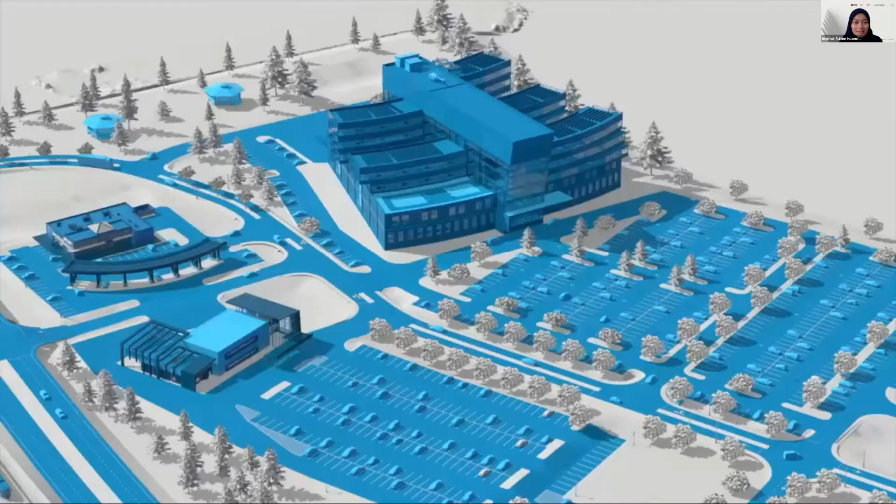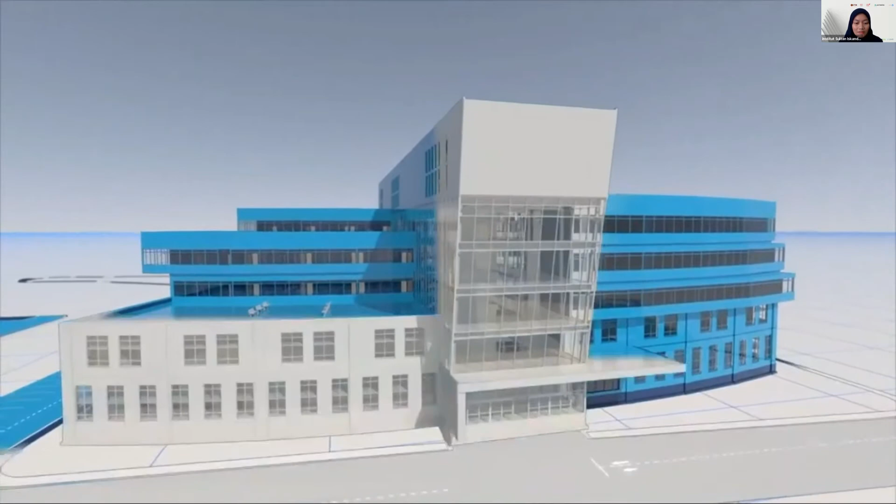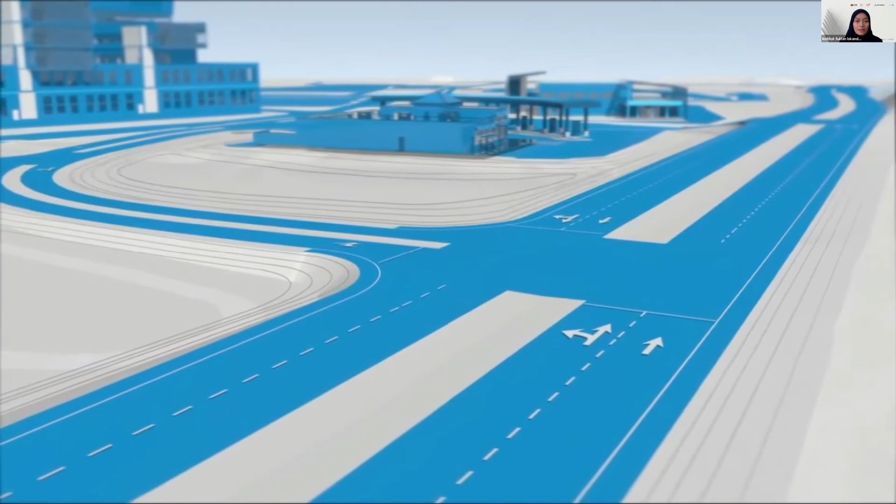Your work changes the map. To achieve success, you need an integrated set of tools that lets you coordinate work across teams, from design to construction. With the AEC collection, every designer, engineer, and contractor has access to multidisciplinary workflows that let them create with ease. Explore what's possible and build with confidence.

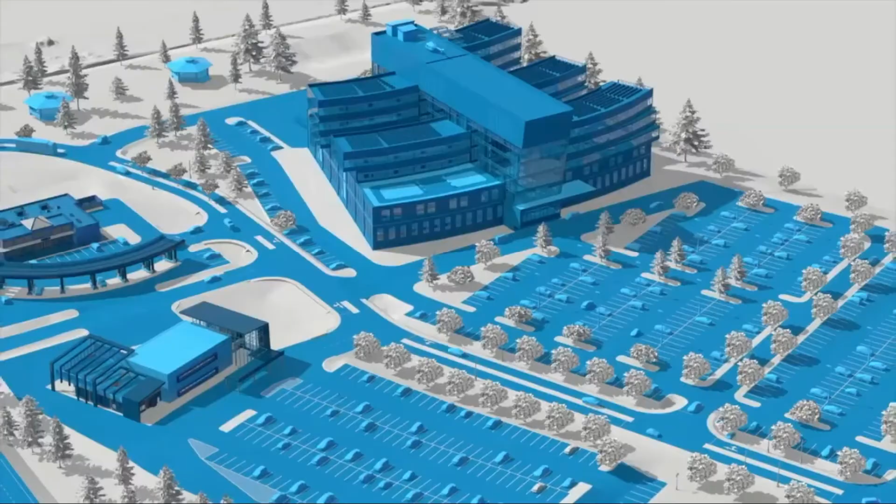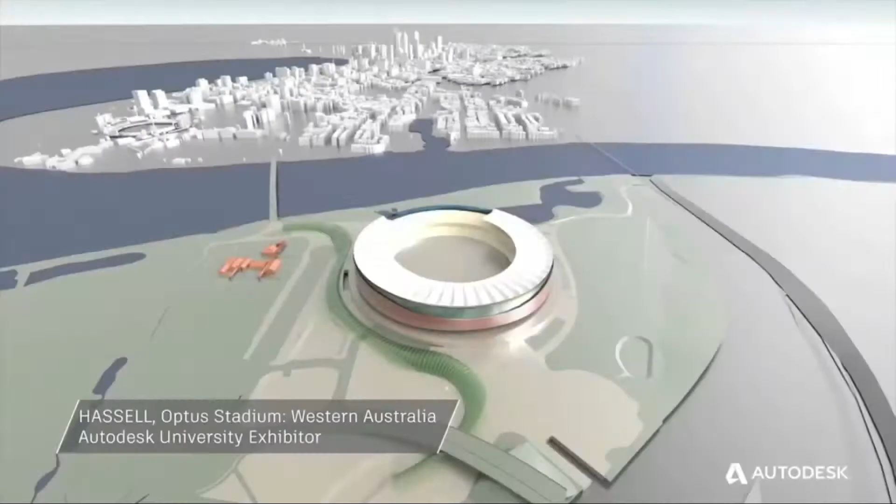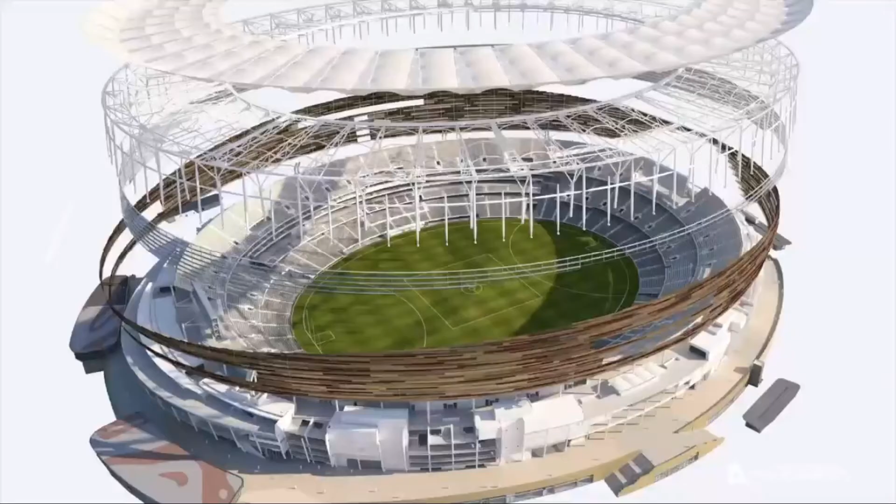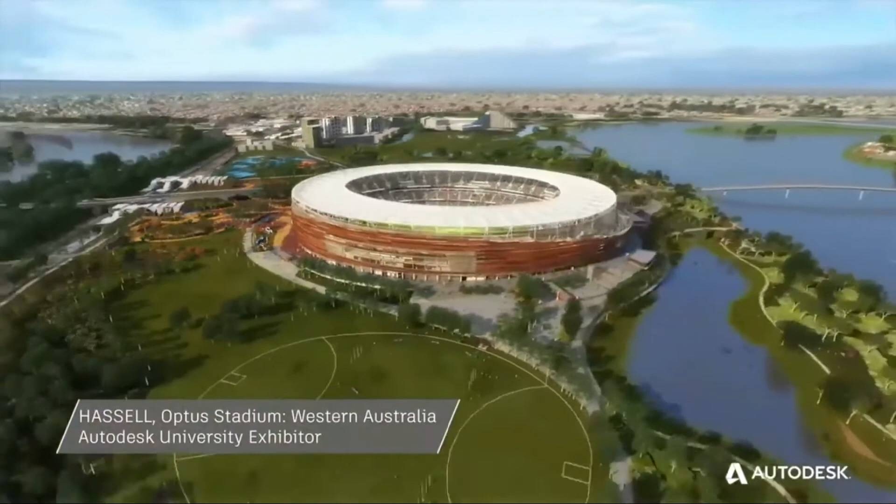To deliver high-performing buildings and infrastructure that transform lives and communities. We want to create the best project, the best experience for people. BIM certainly helps to create a better project. The Optus Stadium project was 149 Revit files, 21 gigabytes of data. Using BIM on a project of that scale helps tremendously.

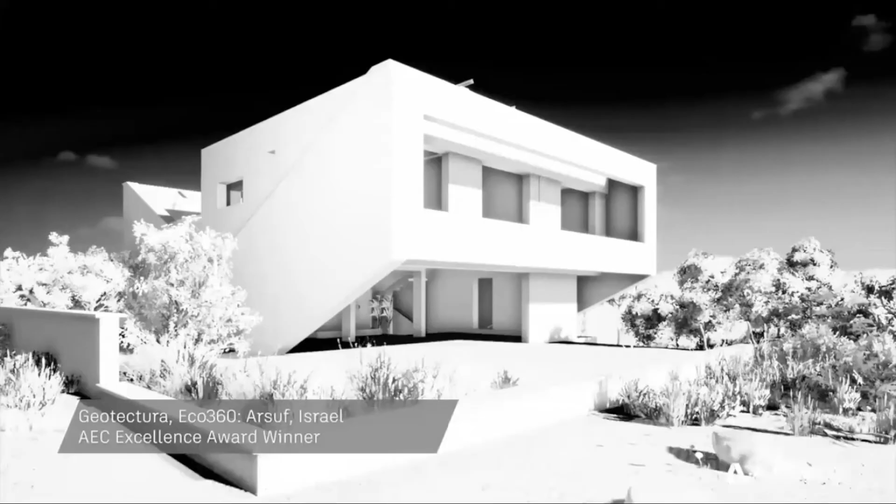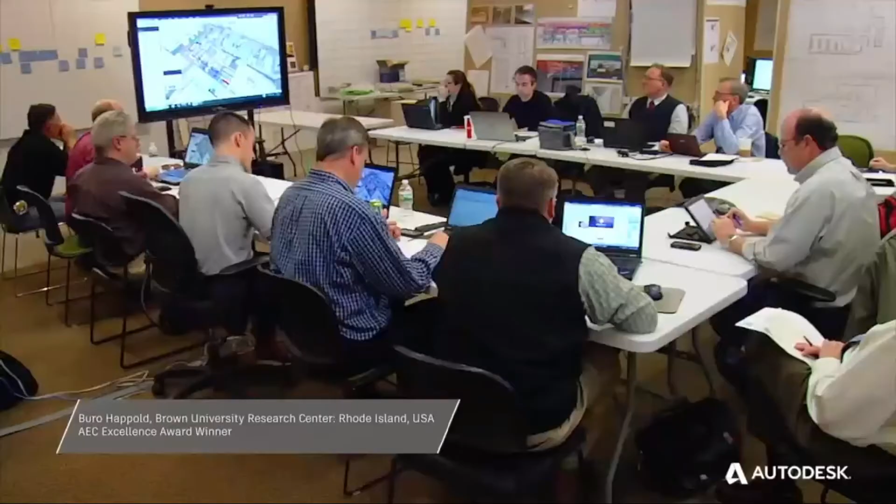Eco 360 is a very small project, but it contains more than 50 elements that make this house very unique. Working with BIM and doing simulations and optimization made me sure that we are on the right direction right from the start. The name of the project is New School of Engineering, which is part of Brown University. BIM allows us to share data seamlessly and allows our trade partners and our design engineers to work together, make changes and coordinate all in one environment.

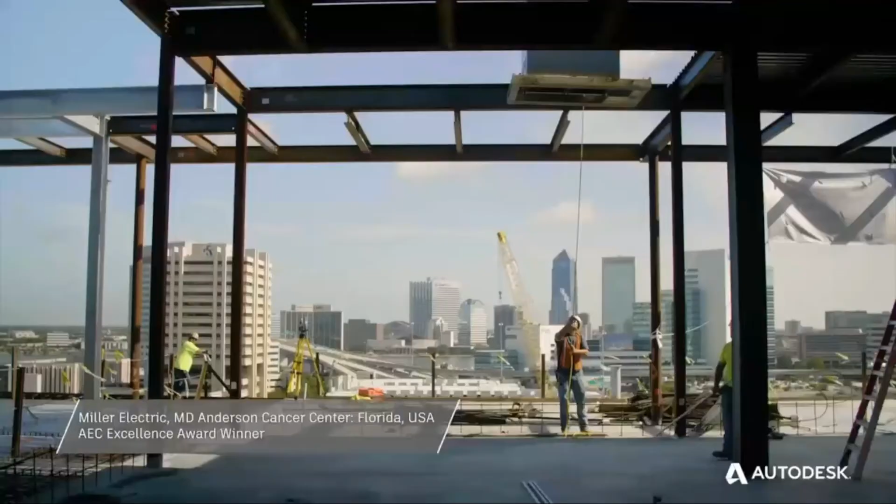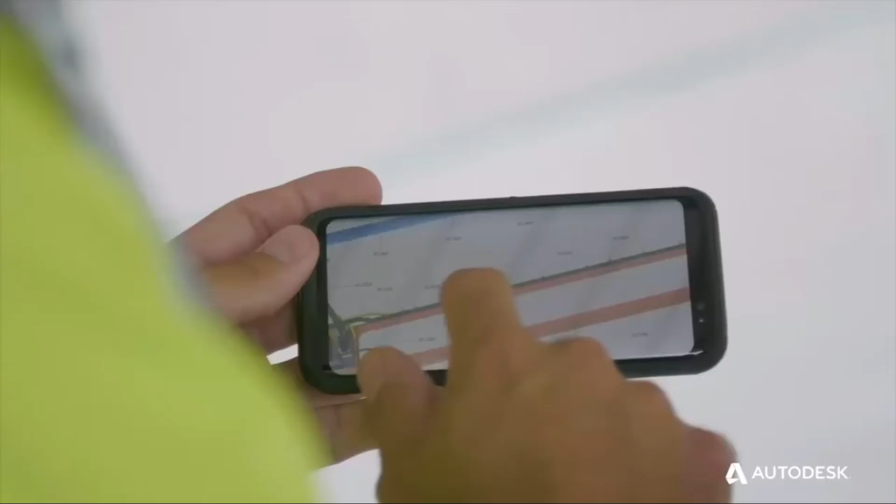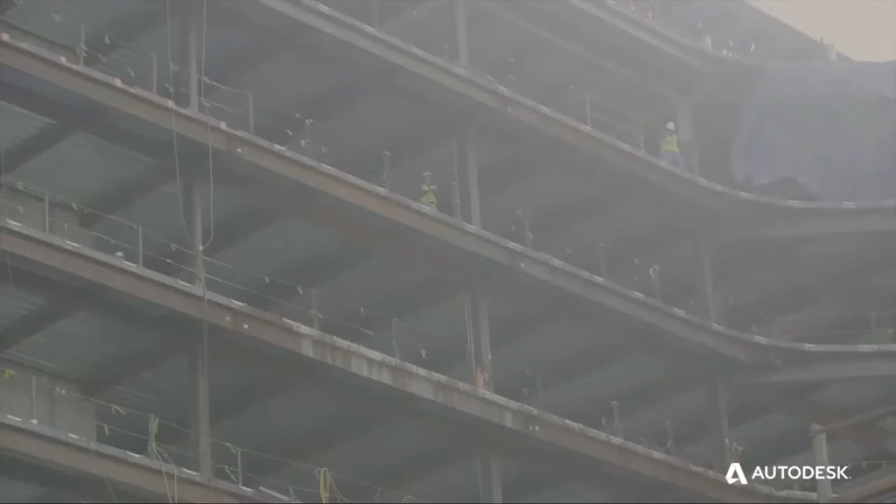Baptist MD Anderson is an exciting project. It's a complex 9-story cancer treatment facility. Building information modeling is key to this project. It's the complete workflow from the very beginning of a project through prefabrication, all the way through to the information delivering to the job site. When you see this building, the design and all the elements, they were very specifically chosen, and it's a project that is intended to be a beacon of hope. We have a 100% success rate on all of our units that we're delivering to the job site. And the only way that we're able to have that success rate is by having the information delivered by Autodesk and BIM.

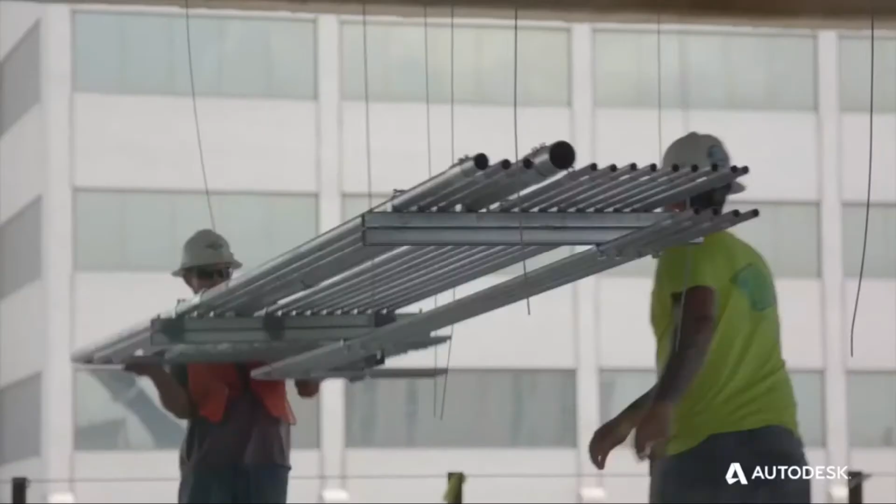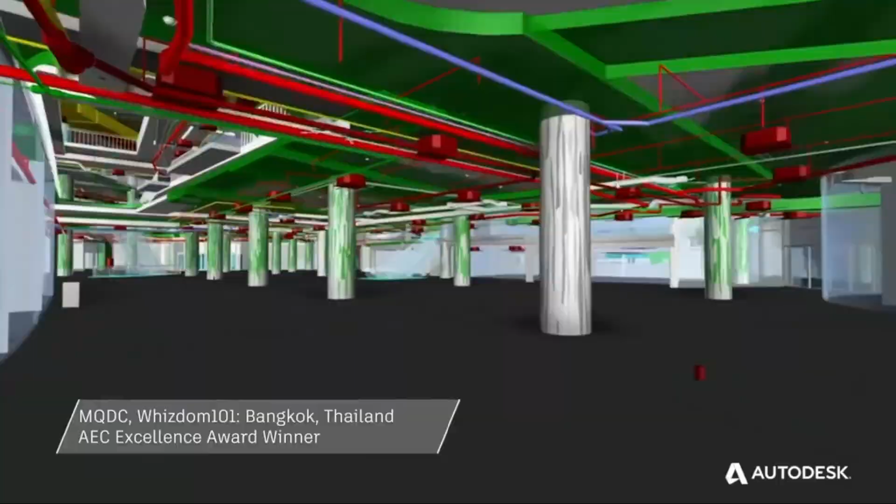Whizdom 101 is one of the key projects. Hopefully this project will help Thai construction to move from 2D to 3D. Use of BIM reduced a lot of change orders, reduced a lot of waste material, and also cost and time has been reduced. We're able to cut off 2 years of construction by 6 months. We can build one building within 1.5 years.

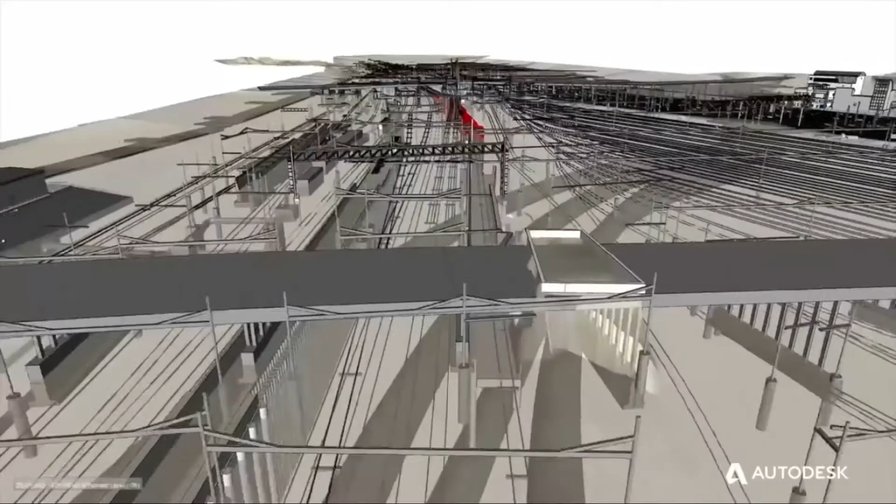East Side Access is interesting because of its size. It's a new train station underneath Grand Central Station. Its tunnels lead all the way to Queens, connecting to Long Island City. It was designed with 2D, very traditional tools. We have converted it into the 21st century. We're finding it would be beneficial to digitize the whole city. I don't think it's a question of if you should use BIM or even what value does it bring. To me, that's not even a question anymore. Why are we not using it on all projects?

Okay, I hope you enjoyed the short video presentation. Moving along, it is now my pleasure to introduce you to Associate Professor Dr. Khairul Anwar bin Muhammad Khaizir, moderator for today's webinar.

He is an Associate Professor at the Department of Architecture, University Technology Malaysia, UTM in Skudai, Johor. Currently a member of the academia at the Faculty of Built Environment and Surveying, teaching Master Studio and allied courses for the Department of Architecture, UTM, and the head of the Design Process, Practice and Management Research Unit at the Faculty of Built Environment, UTM.

He is registered with the Architects Registration Board, ARB, United Kingdom, and had previously been in the practice and consultancy both in the United Kingdom and Malaysia. Previously, he served as the head of the architectural program at UTM in 2009 to 2011 and is currently a LAM panel member for validation and accreditation visits to architectural schools, both locally and overseas. He is also our former Deputy Director of Institute Sultan Iskandar at UTM.

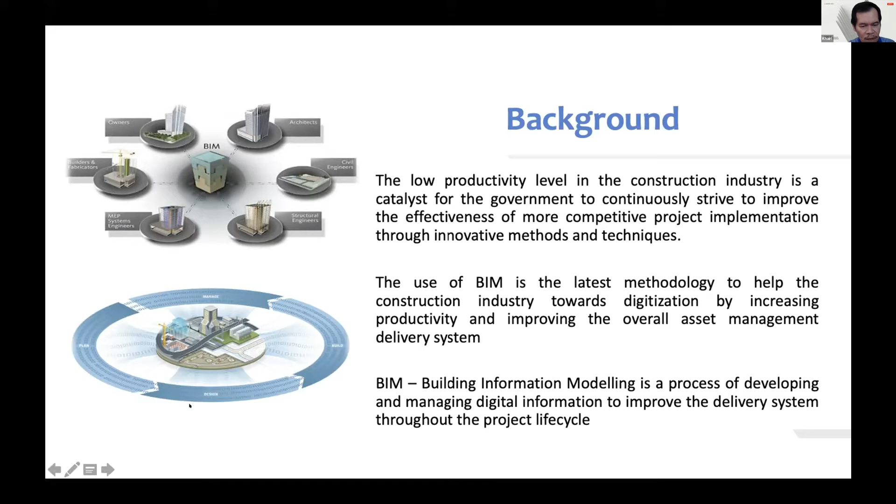Next. So to summarize, BIM is about digital information and the use of standard protocol, well-structured information. The information should be structured so it can be analyzed and used. It comes from one source and it's very dynamic, so we always refer to the information from one source, and that information is shared through all the stakeholders.

It has to be digital technology, and it's about the digital information system, the creation of the information, the management of the information throughout the project lifecycle. And digital, we use the digital process where the information goes through all the process of the supply chain, whereby there's no information loss, and all of this we call integrated digital delivery.

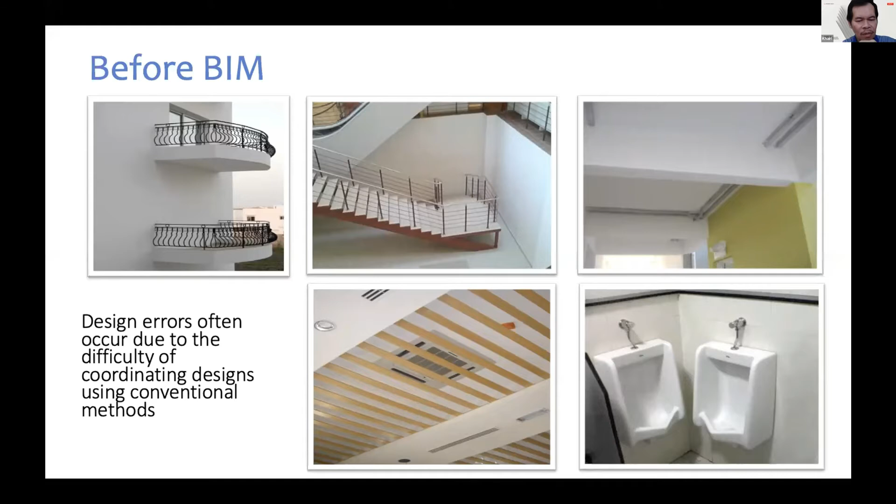So we are dealing with all the documentation. Then by the end of the building, there's still a lot of documentation, and it's very difficult to find and very difficult to manage. At the end, all this documentation becomes useless.

Now we have, even though it's not totally manual, a manual electronic drafting process. It's the same as how we manually produce the drafting before, but we use it electronically. But the process has not changed. The documentation, we still use lines, arcs, and circles to present the building.

We still have 3D presentation, but that 3D presentation doesn't represent our real building. It is extra work where you have to do the 2D drawing, and at the end you have to do the 3D presentation, and the 2D and 3D presentations don't come from one source. It's only for impression, not helping for the construction.

Then we have drafting the drawing. We can produce only a very limited number of building sections to represent the building, because one section takes a very long time to produce. There's no Z value, you can only see in 2D, you don't know what the height is. It's not integrated between plan, section, elevation, detailing drawings, and it's not related altogether.

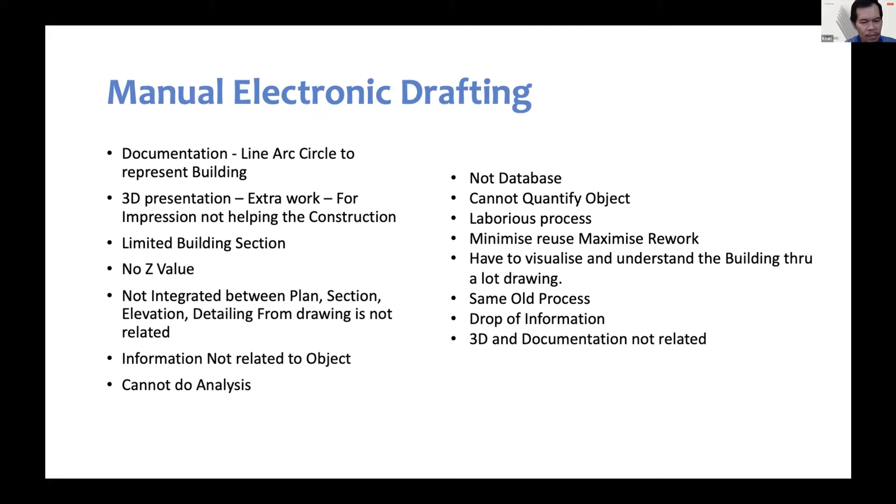This is manual electronic drafting, whereby you draw. You probably use computers for drawing, but it's lines where you have to refer to a lot of drawings to understand the building. Even then, there's a lot of mistakes, whereby the plan is not the same as the section, and the section to the elevation, because it's only a representation of the object.

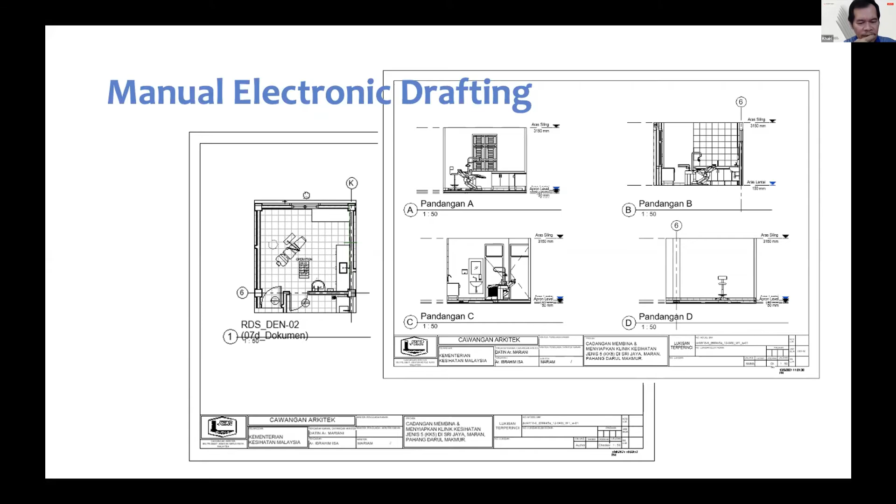So why do we have to use BIM? The first is the value proposition: it is faster in design development. Not to say that you can finish it faster, but if you have the model and want to draw a section, it's very fast - just 2-3 minutes and you can finish one section. You can produce all the documentation. Once you finish design, the documentation is about only 10 to 20% of your project.

You can provide a template, whereby the template has all the information, all the specification or the material, all the submission plan and so on. So it's very fast if you want to produce the documentation, because there's already a built component with the information. It is object-based representation with the information. So you have an object like a wall, you have the information about the wall, the material about the wall, the finishes about the wall, how high is the wall, and so on - the placement, the orientation, and so on.

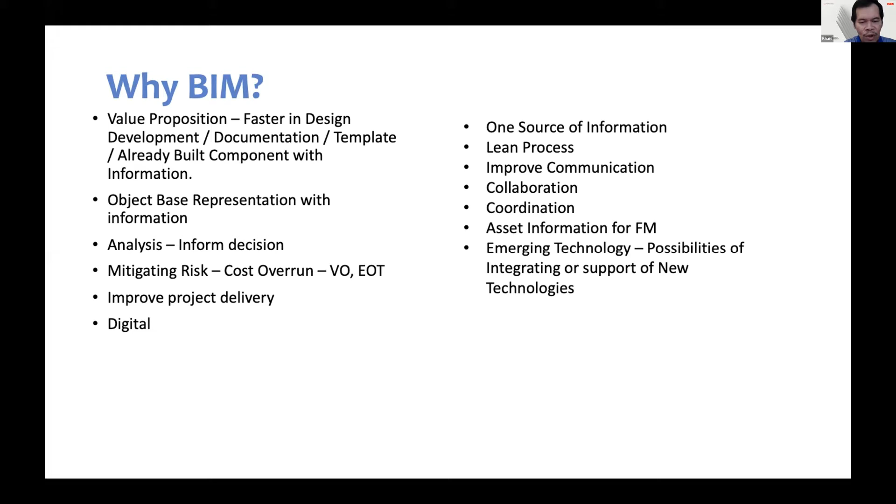At the end, it can be used for asset information, for facility management, operating and maintenance. It can also incorporate emerging technologies, to support new technologies.

So BIM will improve the collaboration method. Through BIM, you share one source of information, and through digital technology, you are enabled to collaborate and discuss, improving the delivery system. But you have to follow a process, to guide the user in particular on how best to employ a collaborative method.

It can also enhance communication. You have a model created before you build the building - everybody will understand it. You can interact with all the stakeholders, most importantly the client, to understand the proposed design and give feedback and suggestions immediately.

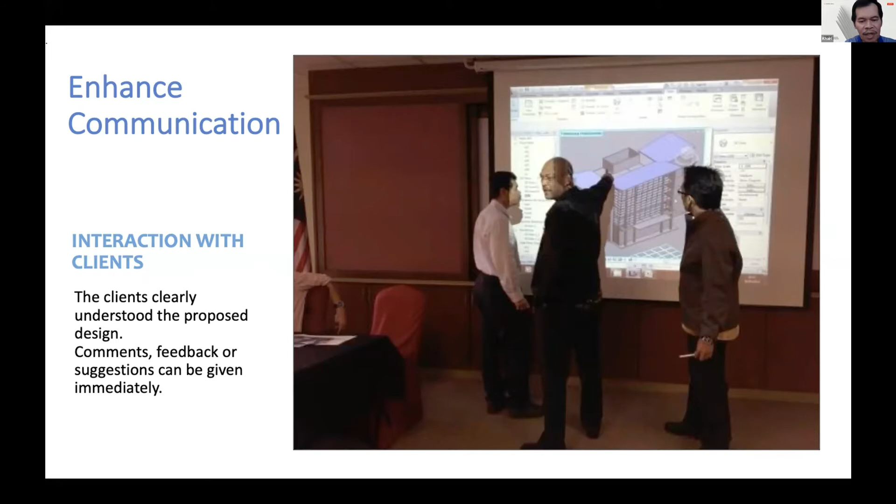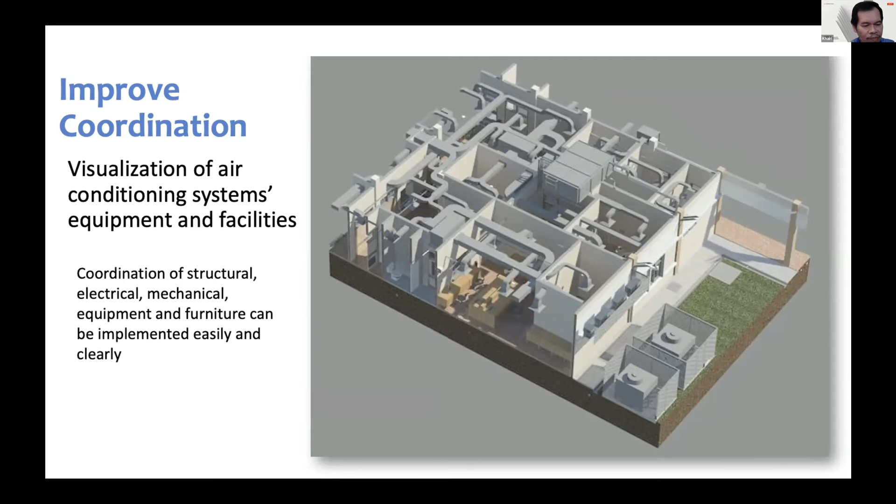It improves coordination. Just imagine all the intricacies of systems like mechanical and electrical in one project, where you have to understand where the systems run, and integrate between mechanical, electrical, and structure - because with a lot of ducting and so on, you have to punch a wall, sometimes a column, and see how the structure supports the services. That is very important, because when you are at the site, there's no time and it's very difficult to solve the problem when it's already at site.

So 3D information modeling is one source of dynamic information. Maximize reuse, do it once, use many means you only create the object once. You don't have to draw so many times. Like you model a door, and you can use it so many times, so it eliminates rework. And the 3D model will produce the documentation when the model is already coordinated, so you can generate the documentation from the 3D model.

3D information modeling is a database, well structured. Information and documentation come from the model. Material, you can quantify the material. It's component based, it's an actual object. It's very intelligent, parametric, and you can do analysis. It acts as a mock-up model before you construct the building. You can get an accurate quantity, and it can do coordination and construction simulation.

3D coordination before was very difficult if you just overlay the 2D drawing, because you cannot see where the services are laid on.

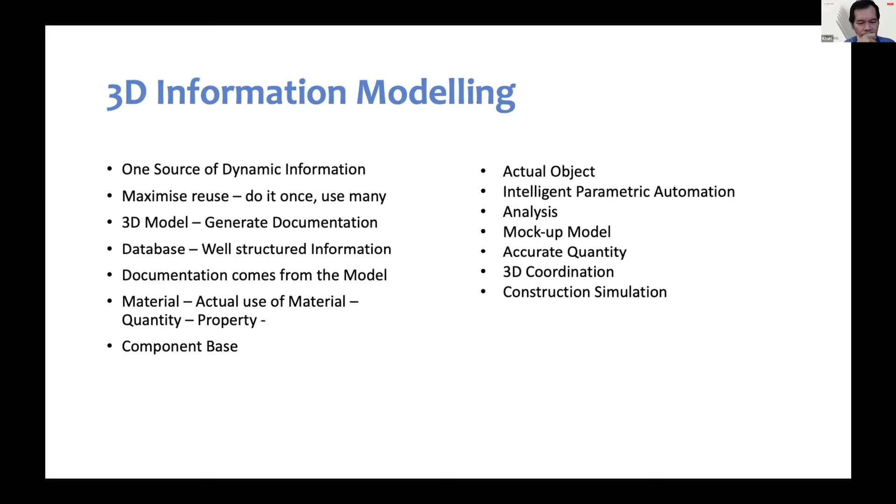You can have the 3D dimension object, intelligent and parametric. You have a Z value, you have like a wall, what is the height of the wall? It's a live 3D, it's always updated. You can get the material. It's rich in information and able to do a lot of analysis.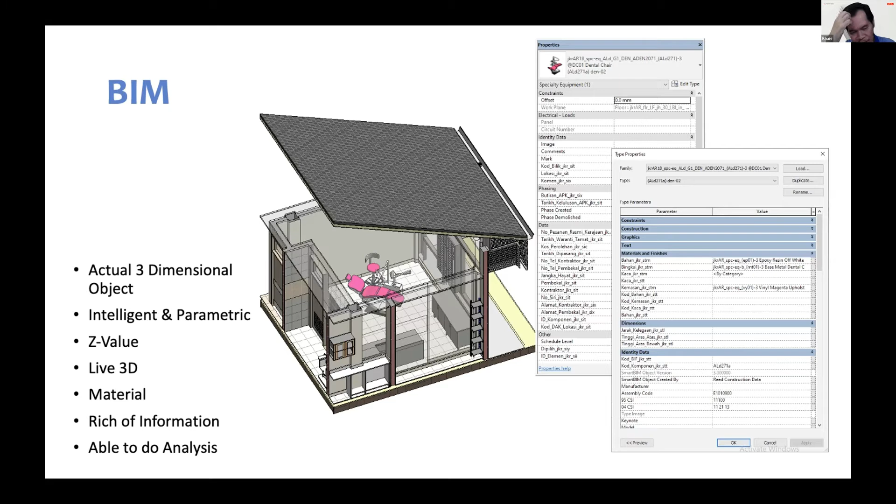When you model the object, there's a lot of information, not like 2D where whatever is in the drawing is all the information. So in the object, you have to identify what is the product, what is the ID, what is the classification. Because if you have a door, what is the type of the door? What is the ID of the door? There's a lot of classification.

Is it a fire door or sliding door and so on? The performance, how well does the product work? And the function and design requirement, all this information resides in the object itself. And the installation of the product and the appearance, what does the product look like? The 3D model itself will show you what the product looks like. And the life cycle and sustainability, how to maintain the product, is all inside that. And we can get it after we get the as-built drawing or as-built model.

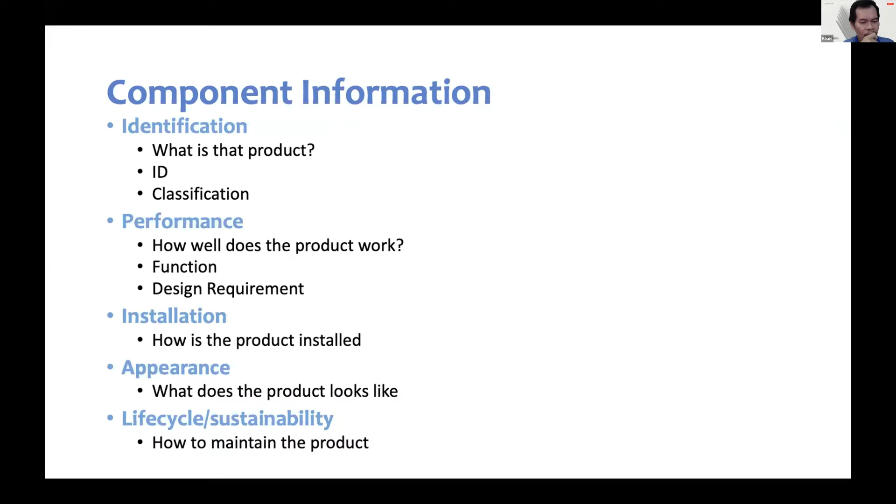Next, please. So for the BIM implementation, first thing you have to get, there's a series of processes that you have to go through. Top level support, develop BIM plan, define what success is, select a team and project, execute the plan, make adjustments, revise and expand.

So start slowly, start with a small project, get support from the management, develop a BIM plan, what is the standard you have to use, who is doing what and so on. Define what is success, what is the goal of the project, so do you achieve it or not? Select team and the project, execute the plan, make adjustments, and then repeat the whole process. Through that, you will learn the true implementation of a BIM project.

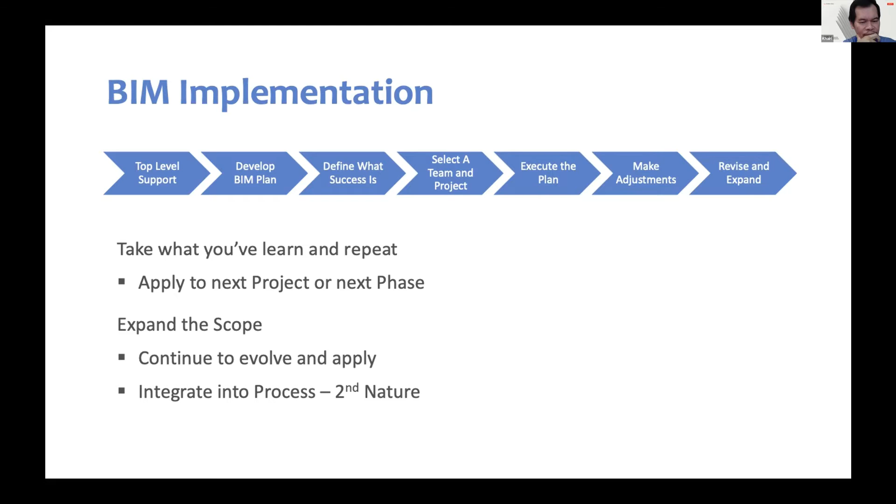Next, please. So first thing is to get the value of the project, what is the objective of the BIM project in terms of the long term and short term?

For the office organization setup, you have to make sure in terms of people, how many are modelers, coordinators, and managers. In terms of mindset, everybody has to be positive. You have to conduct training, evaluate their skill, and make sure they are collaborating. In terms of process, the supply chain of information is integrated and follows the standard through the BIM process. In terms of technology, use state-of-the-art technology and make sure there is interoperability. For policy, you get top management support and compliance to the KPI and so on.

In terms of project implementation, you have to see these four areas: people, process, technology, and team setup. Next, please.

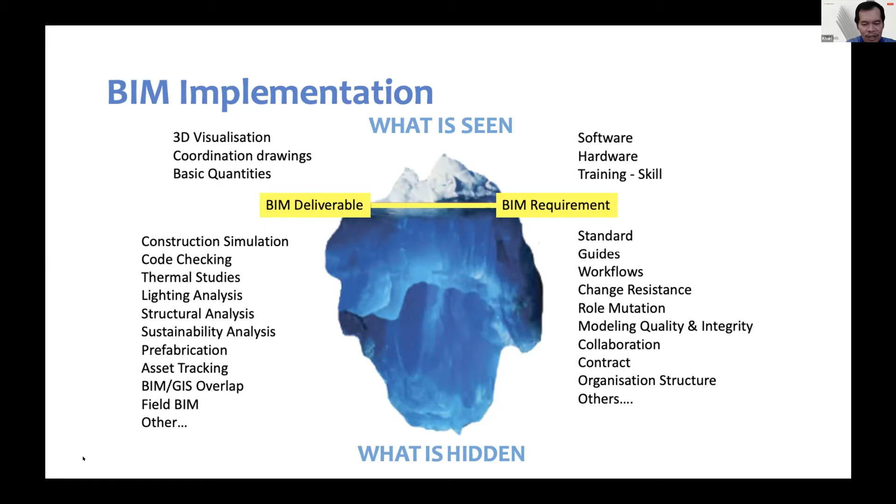In terms of BIM project requirement, there's a document called the BIM project execution plan, whereby you have to state all your process, the project information, the list of BIM personnel, BIM deliverables, roles and responsibilities, BIM work process, BIM information exchange, BIM data requirement, collaboration procedures, quality control, technological infrastructure needs, and model structure. All these have to be discussed and provided to make sure BIM implementation will be successful.

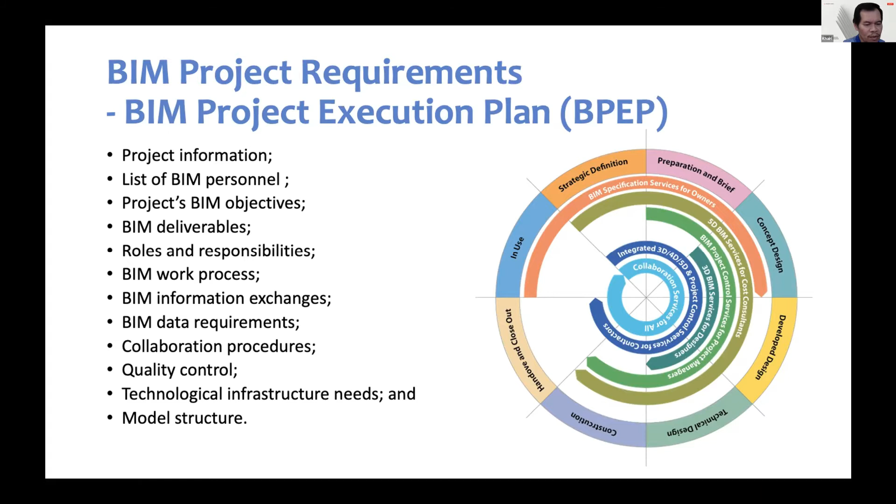In terms of definition of information requirement and the resulting information model, prior to engaging external parties, the appointing party is the client. The consultant has to understand the level of information needed for each information deliverable - what's the information needed, the value of it, the likely cost and time to create it, when information is to be developed, who and how information will be managed, when it is to be delivered, by whom, and in what format.

For the consultant, it is better to create the component before you get the project. You already develop all your libraries, all the information, the specification, the data structure, and so on before you start the project. Then make sure all the modelers, coordinators, and managers know their roles and responsibilities.

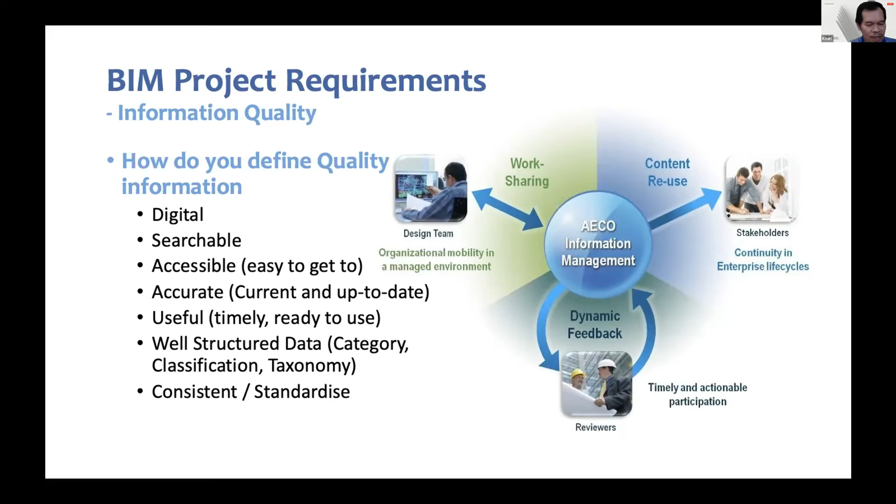The project requirement for model quality is the correct representation in 3D according to LOD, physical form, accurate geometry. It has proper naming convention, contains information with proper legend according to level of information, assigned material, accurate placement, orientation, and space distance between components. It is parametric, with functionality inside - is the object like the wall inside, outside, or which room the object is related to. Correct classification system, can be documented from the model, can be quantified, can be analyzed, and is consistent and standardized.

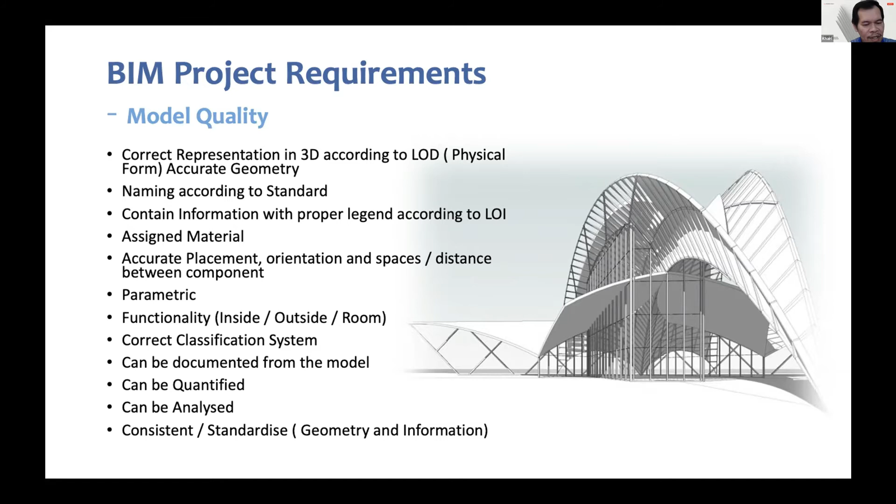BIM implementation success factor: people have to be competent, with systematic, comprehensive, and continuous training, and develop a good work culture. But right now we still don't have that culture whereby everybody knows what to do if we want to implement BIM. We have to have a reference manual, guideline, and standard to refer to. And in the infrastructure, we have to have a good ICT infrastructure, software and hardware that is appropriate and sufficient.

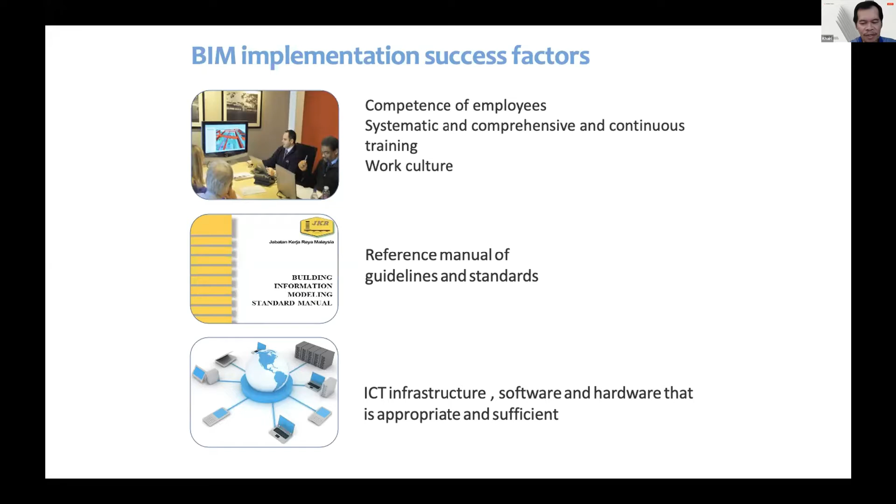The challenges - there's a lot of challenges because it's a new methodology, new technology, in terms of skill and so on. Unable to model according to standard and quality, even though you have already learned how to use the software, you have to have a standard and be able to abide by the standard in terms of special form information. There's no libraries, everything has to be modeled, no details, and you have to calculate the quantity - you have to model everything, but model it according to certain qualities.

Normally not organized means there's no library, not enough information, not standardized, conflicting information, no standard. So 'do it once, use many' means you have to create it once - you have to develop all this, but only once, and later on you can use it many times. In terms of competency and knowledge, there's not enough competency, and always not enough time to improve themselves.

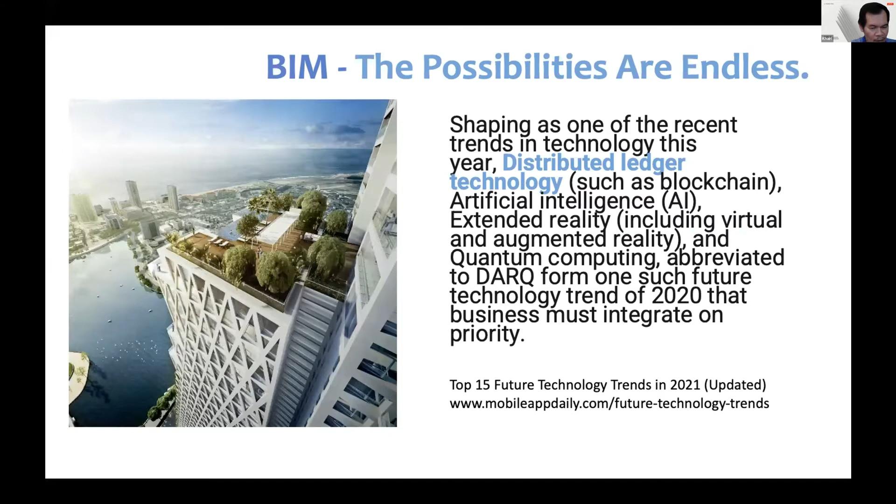Thank you very much for your kind attention, and I hope the webinar will be a great success. With that, I thank you.

All right, thank you very much, Technologist Muhammad Khairi, and wonderful of you to actually stop well before the end. Thank you very much for helping us elicit a snapshot of BIM development in Malaysia. What I gather from the presentation is a very insightful view of the rationale behind the urgency to adopt BIM in the construction industry, and the need to migrate from traditional approaches to the production of smarter initiatives that could be found in BIM processes, as you have just mentioned and presented. Thank you very much for that.

It was also interesting to find the lessons drawn after many years of experience in CAD production, I believe, from your years of attachment with JKR and also in practice. There are also interesting thoughts on the problems and challenges that come along with what we interestingly call manual electronic drafting, which was the traditional way of dealing with computer-aided design.

Technologist Khairi, also the fact that with BIM comes innovation, a comprehensive initiative. BIM comes as a sort of platform and instrument for the construction and building industry to pace itself with the advanced developments happening, for the benefit of the industry altogether.

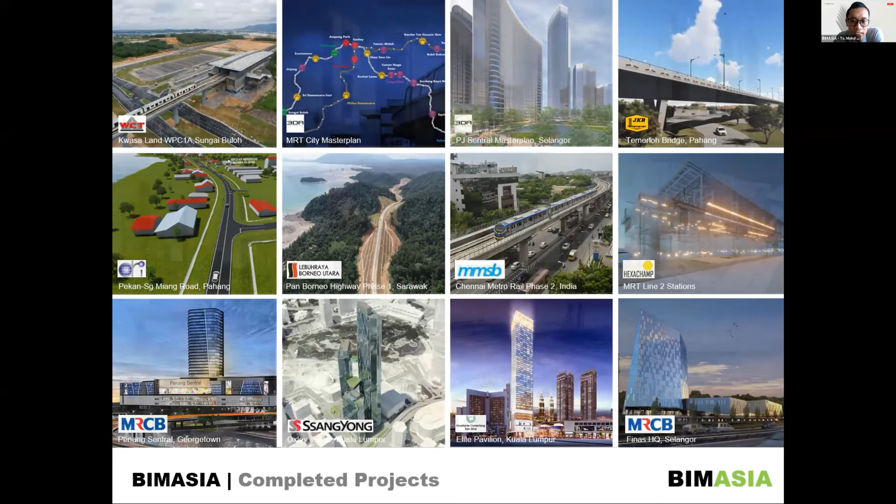So just a glimpse of the type of projects that we're involved in locally and internationally, and some CSR projects that we are involved in, and things that we are currently doing with our clients.

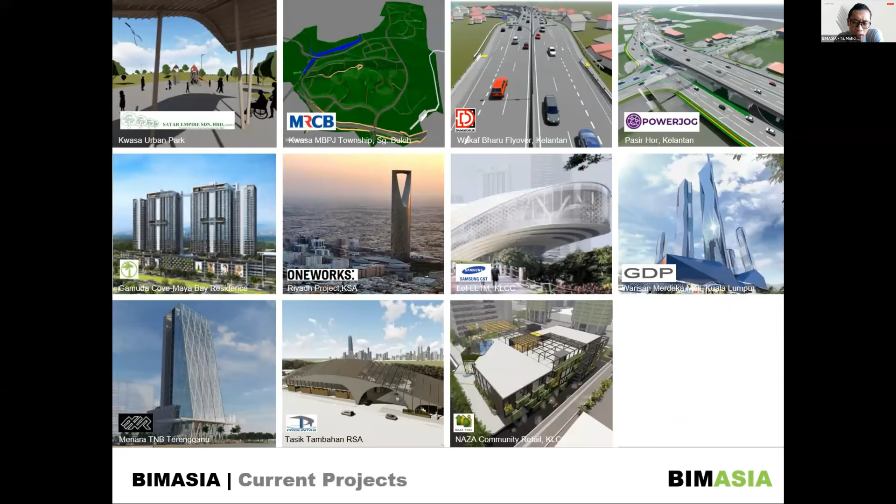If things go well after 2021, maybe things that we have identified in our future projects can be realized and materialized. As a BIM technology partner, people always ask us, 'when we want to appoint a BIM consultant, you will be stretching our pockets and we need to pay more for you.' So we normally come at it another way around, to see it from the value point of view.

Number one, for example with Pan Borneo Highway - before we came in, no one even bothered to understand that there were a lot of uncoordinated gravity elements, such as drainage, not coordinated on site. And these gravity items on site impact the VO and potential changes - it's not the non-gravity items.

So with that particular item that we assisted our client with, the estimate done by the verified quantity surveyor amounted up to 150 million. So it is about how they manage the item throughout the project, because like T.S. Khairi mentioned, a lot of this drawing is still in 2D.

On 2D, if you are experienced construction managers, you can construct in 3D in your head, but people won't know what is in your head. People want to know it on the table in a meeting. That's why when we have this, the client asks, why is it designed like that? We mention it's in your design, like the culvert on top of the road. So then they realize - if it's not constructed yet, it's okay, but if it's constructed, the reworks, changes of location or alignment will affect the bottom line or the cash flow.

So we're talking about a common data environment. Before common data environment, I would like to bring all the participants to the definition of BIM. Like Cik Khairi mentioned as well, if you just type it into the internet, there are tons of different definitions, including for Malaysia.

We have the Malaysian definition set up by the National Steering BIM Committee. But because I've been talking a lot about ISO, I would like to go back to the terms and definitions by ISO. BIM is defined as the use of a shared digital representation of a built asset to facilitate design, construction, and operation processes, to form a reliable basis for decisions. I don't want all the participants to memorize this whole definition.

It's not a desktop exercise. I just want you to remember the item I highlighted in red. ISO mentions 'shared digital representation'. So like TS Khairi mentioned just now, it needs to be shared. What is shared is a digital representation of an asset. The asset can be a building, infrastructure, or oil and gas.

Digital representation is not only in the form of a 3D model, but also documentation, geometrical items, and alphanumerical items. So what it's used for is to facilitate design, construction, and operation processes. Construction, design, and operation processes each have their own process flow. But if we are doing BIM and it's not facilitating this, and more importantly, it's not being used as a reliable basis for decisions.

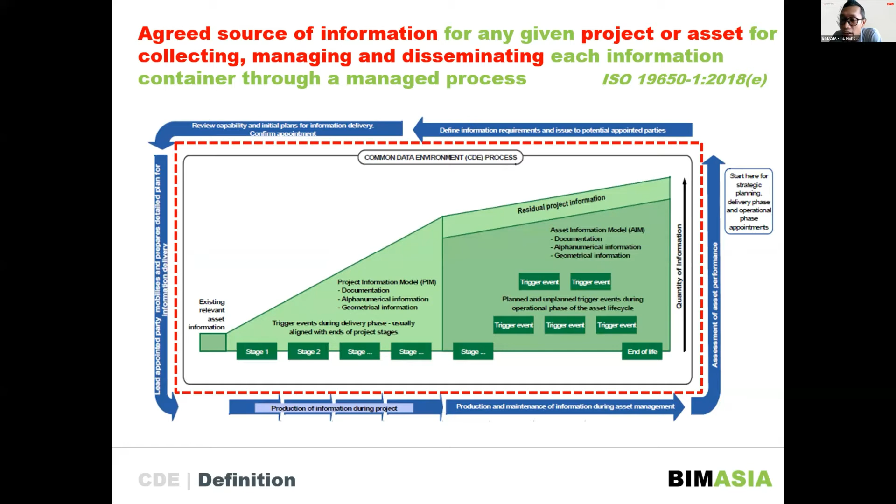So why do we need a common data environment? Number one, like Encik TS Khairi mentioned, it's a single source of truth. If you are a stakeholder in this project, you're not referring to information from WhatsApp one time, then an email the next, then one of the hard copy documents sent another time. No, it's a single source of truth, meaning it's agreed and pre-agreed before you even embark on the project.

The platform to be used—I believe for government projects, there's an initiative with MAMPU that has been done to set this up for government projects. And for decision making, if the key person wants to decide on any of the items, that would be the reference they use.

And a consistent approach—you're not focusing on just project A as the standard you'll be using, with a CDE specific to that project, while project B uses a different method altogether. If you want to leverage the big data coming from this platform, it needs to be consistent. That's the importance of having standards before you even embark on this CDE.

And information exchange—what's being agreed, what type of format, and when it needs to be delivered, that is the information exchange.

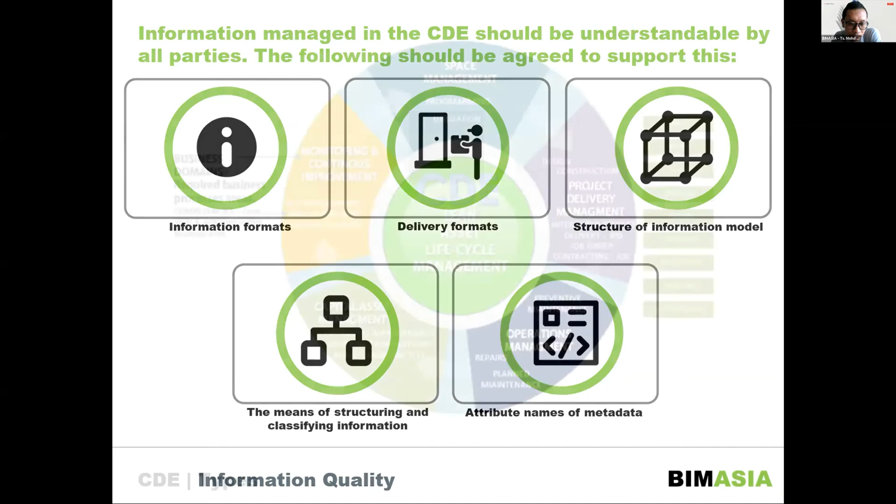CDE, people talk about CDE in the market as well. There's a lot of different types of CDE. It's still a CDE, a common data environment to support the lean asset lifecycle management. Some of it is focusing on the business point of view, on the business domain. Some of it is focusing on spatial management, this is more on the asset management part. Some of it is focusing on project delivery management, some on operation management, and some on capital asset management. So there's different types of CDE. We can't even say, when I mention CDE, that it's BIM 360. That's not the case. There's a lot of different CDEs, it's just that people don't call it a CDE. So by having understanding of the definition of CDE that I mentioned just now, there's actually a lot of CDE out there in the market.

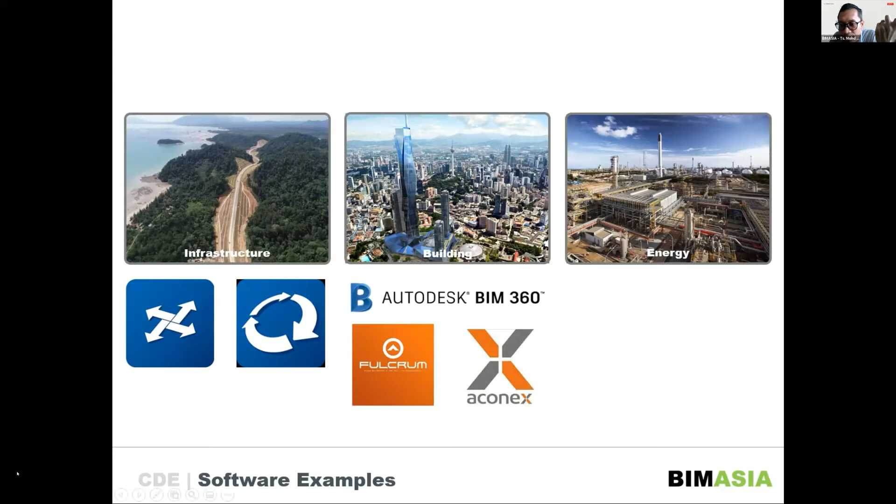So just an example in the AEC industry, types of CDE in the market range from Bentley, like AssetWise and ProjectWise for infra, so their strength is on infra management. For building, you always heard about Autodesk BIM 360, Fulcrum, Aconex, and for energy, like I mentioned earlier, Hexagon AVEVA. So some examples of CDE, just a snippet of this.

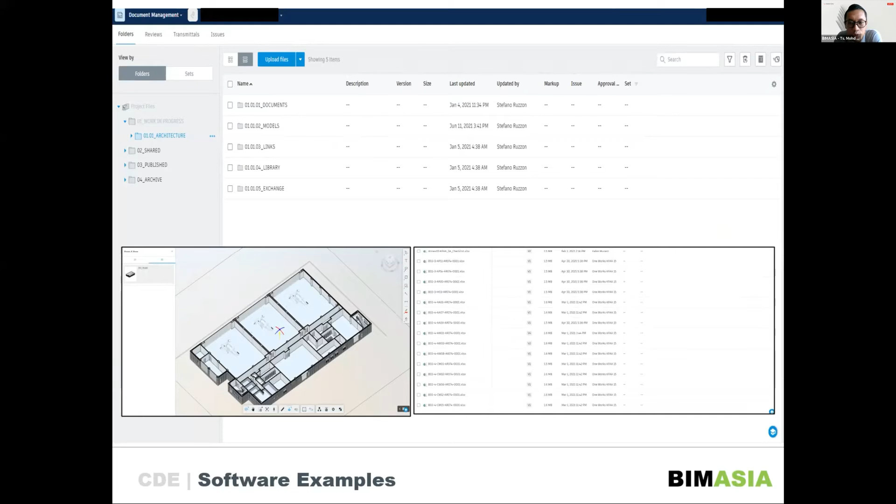This is roughly how it looks in the CDE. This is where you have all your models inside, and not only models, but all the documentation as well, and it's in a structured manner where if you are looking for certain items, you can find this in place. And to see the performance of the project, how many RFIs have been opened or closed, you can even browse inside the CDE as well.

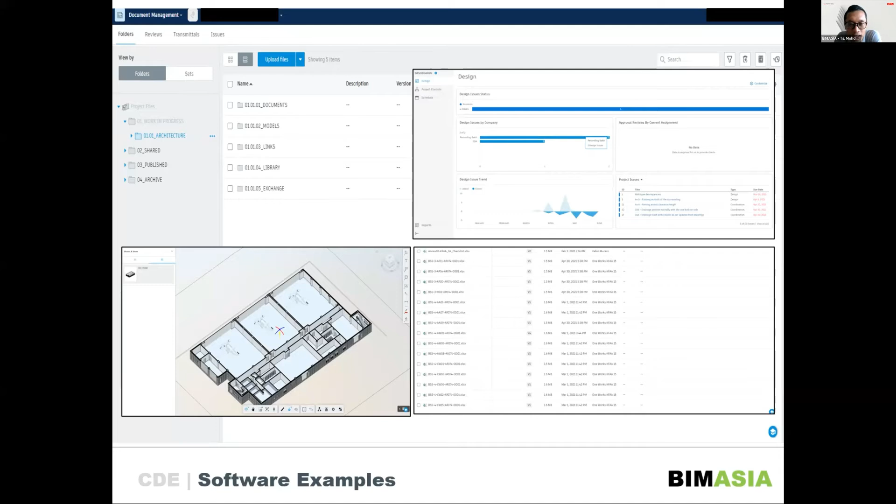And another reference of CDE, Autodesk, you probably always see this different kind of CDE, like Fulcrum. They're using the basis of IFC, so the mode of collaboration is more on the open BIM part. You're using IFC to collaborate and do management on the data set.

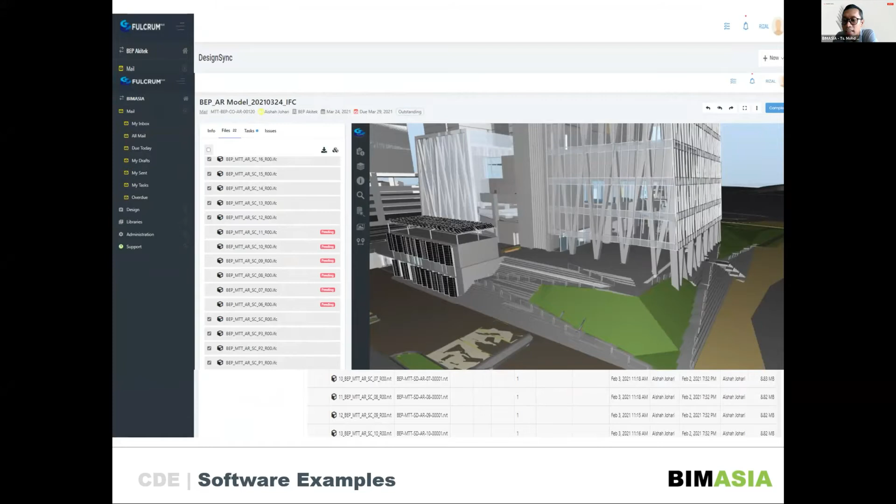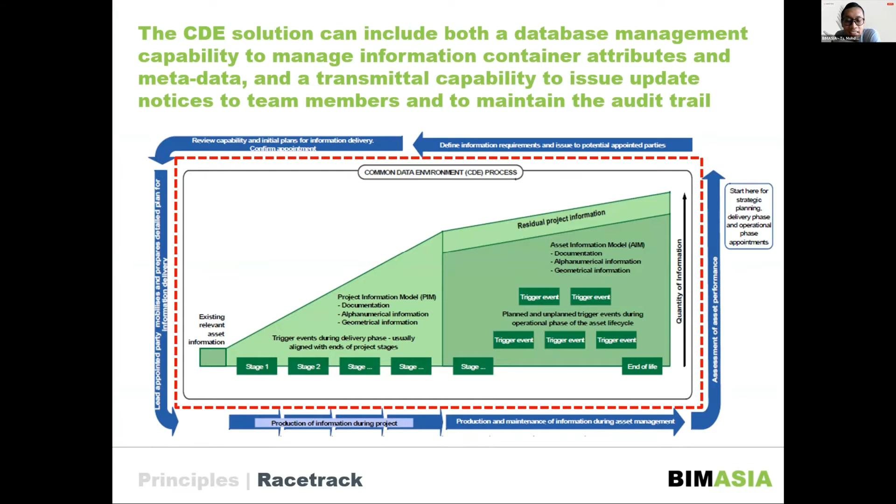So key principle, I have 2 minutes left, a quick one. So the principle for this, coming back to this racetrack. So the item, when you talk about CDE, there's a rigorous process that it will need to go through. It's like a cycle. So what is the cycle? So this would be the items involved in the CDE cycle.

It starts from work in progress. So like for a consultant, you are doing it on your server in the office, or using a certain cloud platform, and you have a rigorous checking mechanism within the organization. So once it is fit to be shared with other consultants or the client, it goes to share. This is where you share with your engineers, your architects, QS, and even relevant other parties like surveyors and so on. And after this has been vetted through with the team, it goes through this movement or process to publish. Publish is the one that is verified, normally by the client, and it's used for certain purposes like tenders or building plan submission. And after that, once it's completed at a certain milestone, it goes under archive.

So all this is important because, like T.S. Khairi mentioned earlier, the information is rich, but the key question is whether that information is rich and applicable or relevant at that particular time. Who has reviewed it? Who has approved it? Has this gone through with other consultants or not? You are sharing with me, but have other parties seen it or not, or yet, or yes. If yes, then it will go to publish.

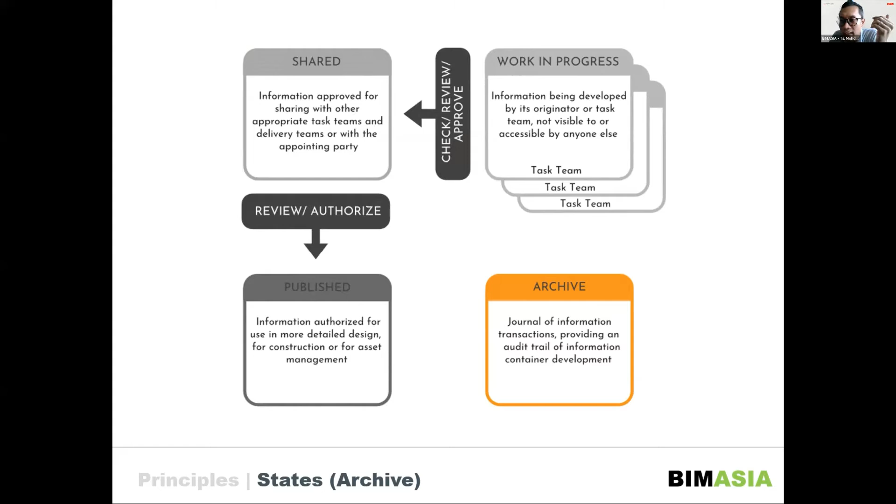I think by having the principle of CDE, you're having rich tons of information. You need a state or areas to manage this. And in BIM, if you are implementing it according to ISO, you can read it. It's a lot of text, sorry to say, but if you follow it, there's a reason behind why it's been mentioned like that.

So people always ask about the CDE, who will be the custodian. Mentioned by ISO, there are two types. One is the client, meaning the CDE is being set up by the client, but it's also mentioned in the ISO that the client can appoint a third party to become the custodian of the common data environment.

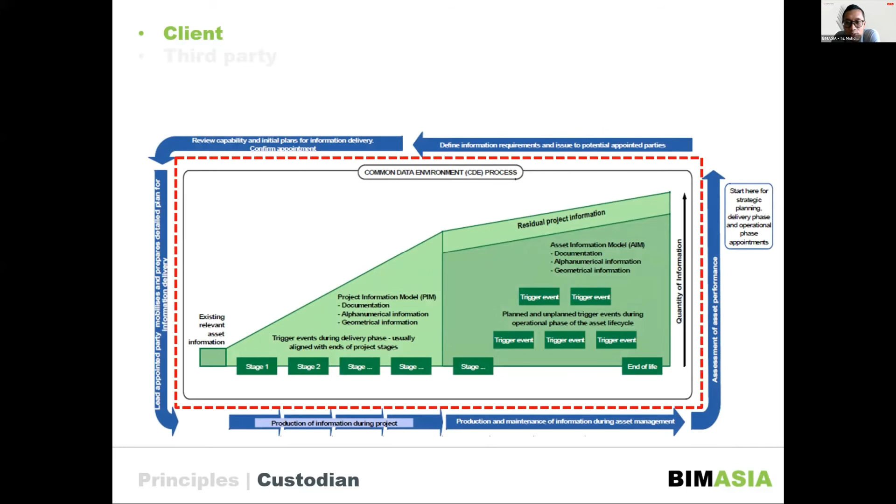So this sums up the thing that I would like to share with all the parties. Thank you again to fellow moderator. Hope that my sharing session meets and benefits the participants as a whole. Thank you.

Over to you, Mr. Moderator. Thank you very much, Technologist Muhammad Rizal. A wonderful talk given today, providing a penetrative outlook on the ethos, nature, and characteristics of work that BIM Asia is involved in. Interestingly, in your presentation, you gave a general idea of how we actually work in BIM in terms of a specific framework and model, one that facilitates a common data platform and environment. I think this is something quite essential, meaning it is very information driven.

With regards to implementing BIM in the industry, for example, and the necessity to have the right environment for that data to be shared, and many of the aspects that you have, including collaborative work in terms of publication of this data, and also archiving this data in the rightful manner. This is very appropriate, because certainly working with BIM stipulates that there are principles to be adhered to.

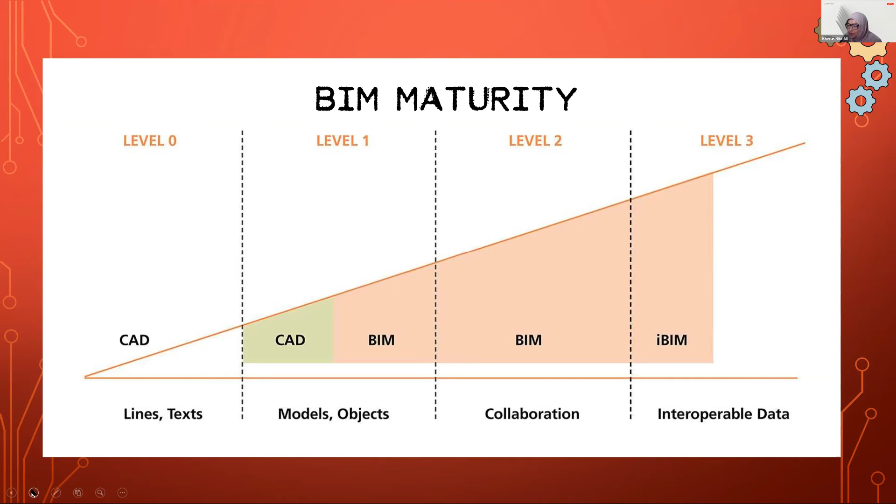So what would be, in terms of collaboration context, looking at BIM maturity in collaboration context: level 0 is where we produce documents, basically 2D drawings, our BQs, our other documents based on the 2D drawings. The files are shared, of course, but we share separately, and it's all scattered all over the places. There is collaboration, of course, in construction projects we have collaboration. It's not total zero collaboration, although we don't use BIM, we use CAD drawing, but we still collaborate, though it is low collaboration.

In level 1, it's partial collaboration, because in level 1 we use more - it's a phase where there are more entities in the project that can share documents, share the models, and work on the same models. But we still produce drawings, of course, the ISD drawing, the construction drawings, for approval, for payment and things like that. So there is collaboration, but it's partial collaboration.

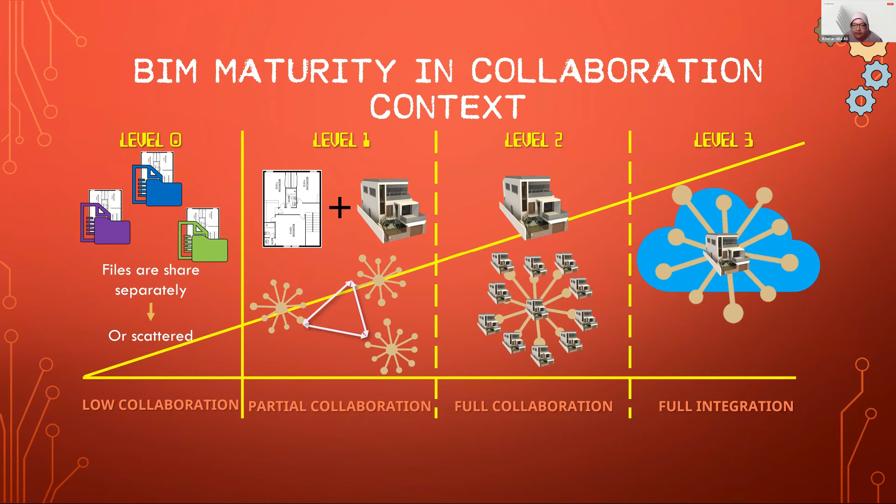In level 2, it is full collaboration, where maybe not totally using models, but this is where full collaboration is, by definition. And level 3 is on the clouds, it's full integration. As I said just now, I have not known any project that reached this level 3. But if you know any project in the world that have reached level 3, please let me know, I would like to understand and study them.

The previous speaker also mentioned about trust, and support - these are the people who support each other, and they need skills. In BIM, we need BIM skills. No skills, then no project, no BIM. Don't talk about BIM if nobody there knows how to use the models or how to coordinate and things like that. And we are working together, we discuss, we connect, we plan. These are all required and important in collaboration, but they come with risk.

The actual fact about collaboration is, the definition you will see anywhere, is that collaboration is working together towards one project goal. Communication is important in collaboration, but it's not just about communicating with each other, like talking and discussing, brainstorming ideas - not just that, but working within the team, doing action till the work is done. And the most difficult part in collaboration is doing it together.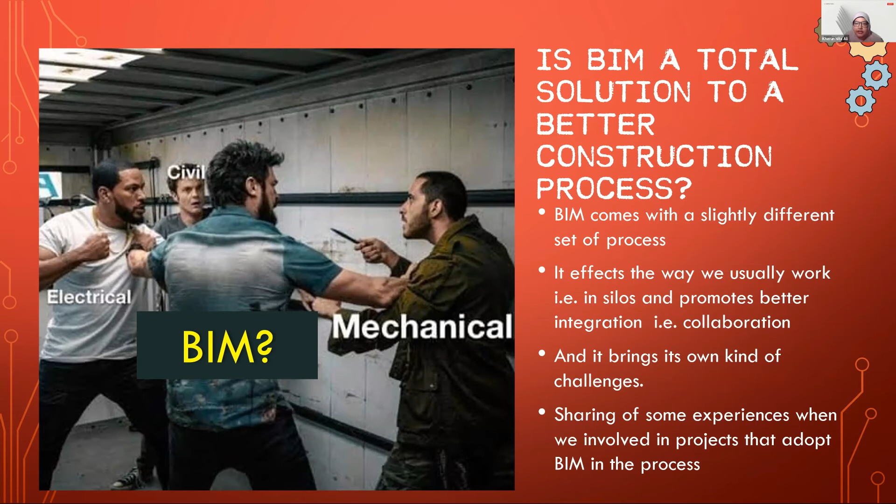So, collaboration requirements and challenges. A lot of people will see this kind of figure - the importance of people, process, and technology. And as Rizal was mentioning, people is right, which is true, because although we say here is process, we need people to understand the process. If these people do not understand the process, it will be a daunting process for everybody. You need people to understand, to have knowledge of how we work, the sequence of work, the communications, and then to understand - behind the process is people.

And technology - of course we have to understand what is a common data environment. Thank you, Rizal just now explained quite clearly what a common data environment is. And BIM software - whatever kind of software we need, remote collaboration - but behind this is human, behind this is people. So the most important part in collaboration is people.

But how do we get people to have all this knowledge and understanding? These people need to understand BIM. These people need to equip themselves with knowledge and skills. What are they? I've combined requirements and challenges along the way in my slides.

So one of the important things is understanding the fundamental knowledge of BIM. The project that we got by chance is a mega project in Kuala Lumpur. It's not completed yet, but once completed it will be a pride of the nation. We got involved with the project by chance.

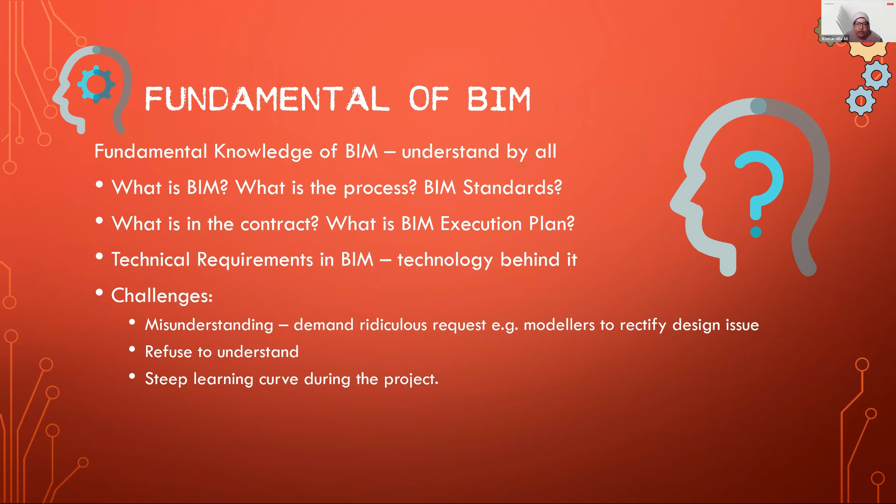All right, so the BIM execution plan. Okay, it can be part of the contract, but if it is a level 2 BIM project, it has to be part of the contract. I used to justify to other people who claim that they were involved in a BIM project, I would always ask them, do you have a BIM execution plan in your project? Okay, if you say no, then don't call it a BIM project, because you don't have a strategic plan for the BIM implementation.

Okay, but it was a process for everybody, especially in this country at that time, many years back. But now, okay, the BIM execution plan—if you want to get involved with a BIM project, you have to understand the BIM execution plan. Maybe one of you will become the BIM manager who produces the BIM execution plan. Okay, this is one of the documents that is very important in BIM implementation.

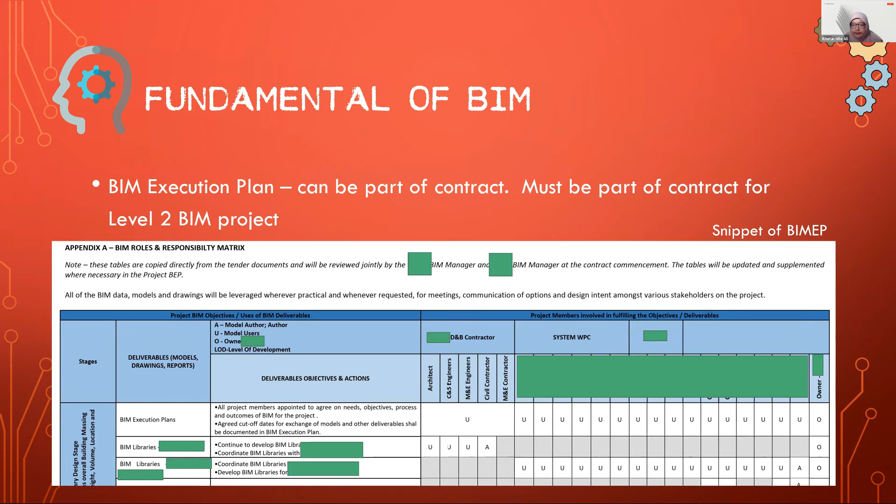The other part is modeling. The 3D model is a medium of communication. Why? Because in the BIM model there is information. This is a medium of communication among designers, for you to refer to and discuss, look at the models - and if it's not supposed to be like that, okay, we change it.

It's also from designers to modelers. When designers fix on this is the kind of design we want, inform the modelers and the modelers will do it. Modelers are like drafters during the 2D era, and drafters are not designers.

So modelers - if the designers are also the modelers, that's good. But there are modelers who are trained to be modelers, but they are not qualified designers. So as a designer, you have to translate the design to the modelers.

The model is also for you to deliver information to the workers on site. So it should be modeled in a way that it can be referred to by the people on site. So there are levels of development - that's something you need to know.

LOD 100 to 500, this is the amount of information in the models. And during modeling, this is where modelers request for information, request for change, and information from the coordination report that you need to rectify in the models. This is the modeling exercise that needs to be done.

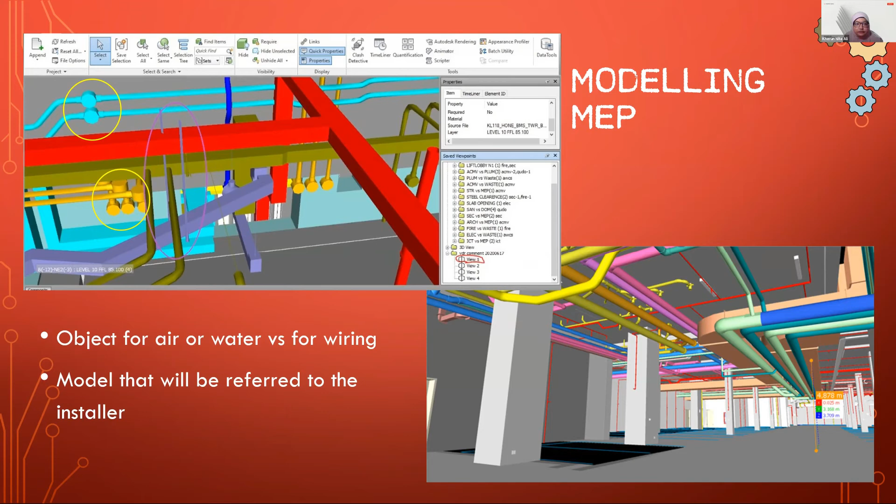From the aspect of modeling, theoretically we model then build. In the book they say model it at the design stage and construct it at the construction stage, but in the real world, model and build happen in parallel due to BIM implementation being decided in the middle of the project or at the post-contract stage.

It happened - in this kind of project we have to work hand in hand, we model at the same time. After we model, straight away they do it. It's not based on stages like design stage, construction stage. No, it's all in construction stage. I model, you build, I model, you build.

But the challenge here is, going back to the people issue - when they don't understand the BIM process, we are modeling it, but they already install it. So in the project that we're involved in, we have just started modeling 2 floors - this is an MEP project.

We had started modeling 2 floors, but suddenly they called us: 'Wait, come to the site, please, and measure what we have installed.' I said, why do we have to measure what you've installed? You're not supposed to install it because we are modeling it. But they had installed it and wouldn't approve our claim, so we had to come measure it on site and make sure it matched our models.

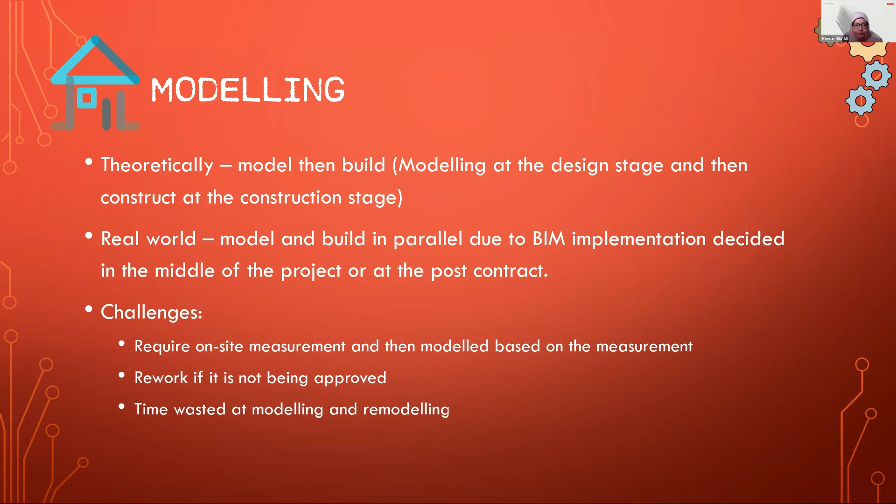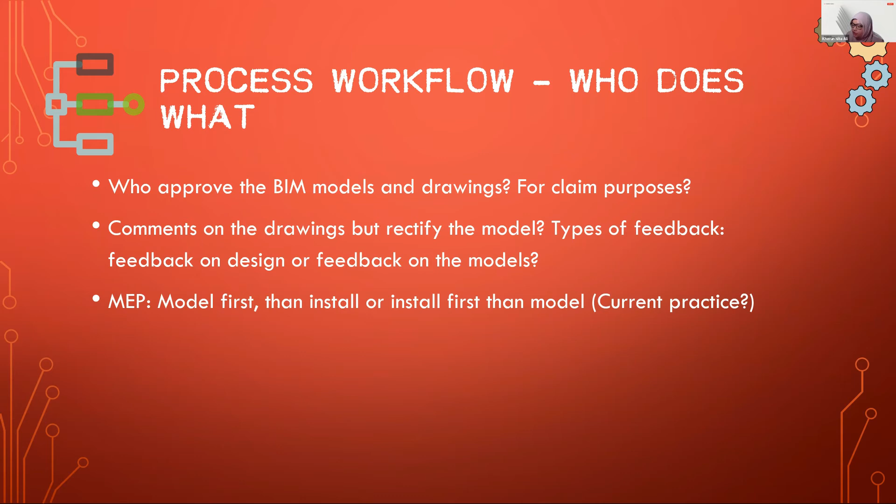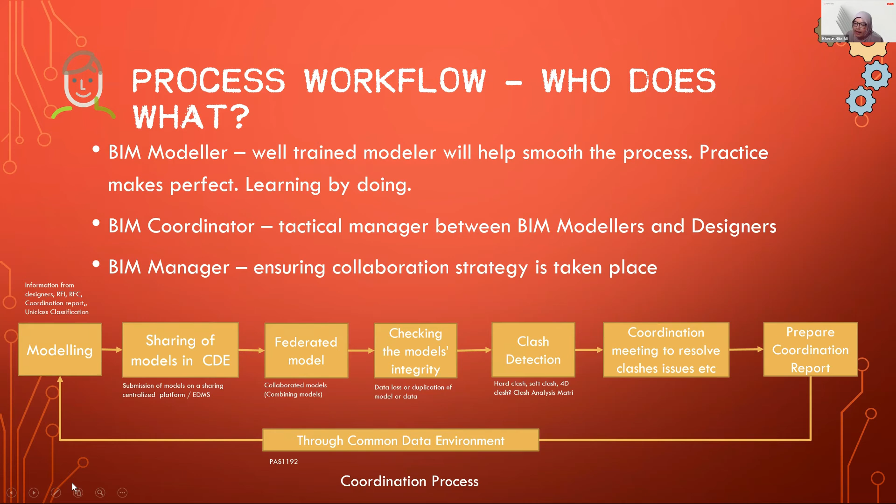There's time wasted on modeling and remodeling. The other one is process workflow - who does what, who approves the BIM models and drawings for claim purposes, things like that. These are the coordination processes, from modeling to federated models, clash detections, preparing coordination reports, and going back to modeling. These are the things you need to understand.

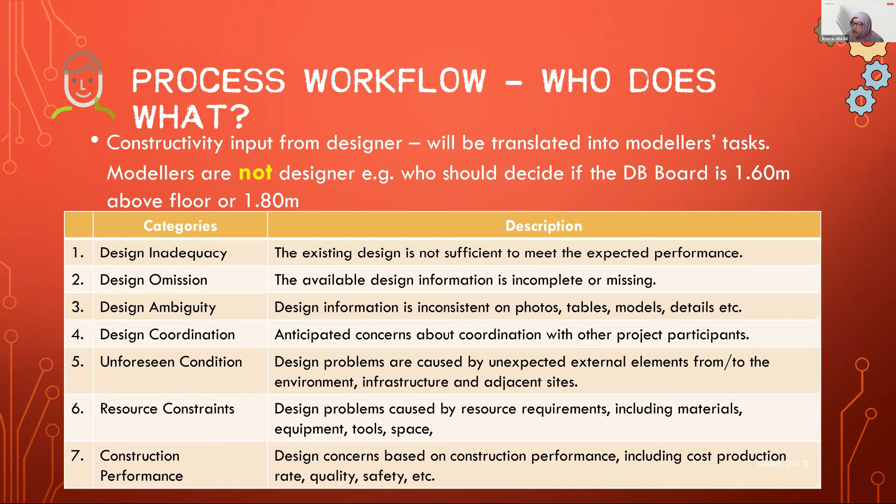For process flow, who does what in terms of constructability - these are the issues in constructability, and we did an analysis on coordination issues, based on projects, that same project that has a few buildings.

The coordination issues findings here show constructability is one of the highest coordination issues. The related departments are mechanical and structure - most issues come from those departments. We are not pointing fingers here, just saying that all the coordination issues, we categorize it in that way.

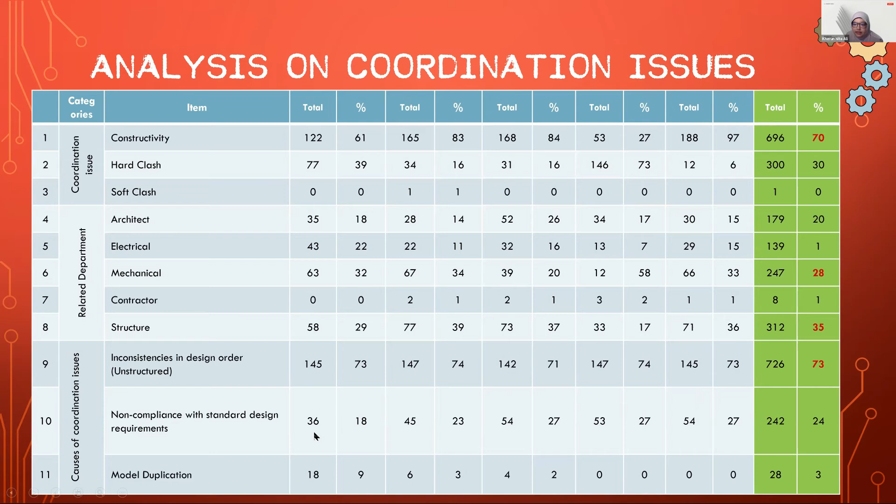Causes of coordination issues: inconsistencies in design order - one former speaker mentioned unstructured just now - is 73%, and non-compliance with standard requirements is 24%. These findings show they did not update the model based on the latest information provided in the CDE, and did not share the models according to the schedule dates.

So in conclusion, the key to the collaboration aspect in BIM is communication. Okay, to communicate what?

Communicate information, the delivery of information from one unit to another, and deliver the right information. BIM knowledge is the main requirement. To understand BIM is to start implementing BIM. So more industry players should take up BIM and start your BIM deployment. We have BIM Asia here, we can help you.

Many challenges discussed above can be resolved when more projects adopt BIM, so that more construction players will get a hand in a BIM project. Certain companies only got projects, so we want more construction players to have a hand in the BIM project. With that, we can increase the competency in everybody in the industry, and eventually we will be able to reach the maturity we hope to achieve.

And it is an education process. Unfortunately, it has to take a lot of time. Graduates with BIM skills are many, up till today, from many universities, polytechnics, institutes, kemahiran. We have graduates with BIM skills, but BIM projects are scarce. Blame it on COVID-19, at least for now. Hopefully, if COVID-19 is over, we have more projects, we have more graduates that have good BIM skills to contribute to the construction industry. I think that is all from me. Thank you for listening, apologies for taking the maximum time.